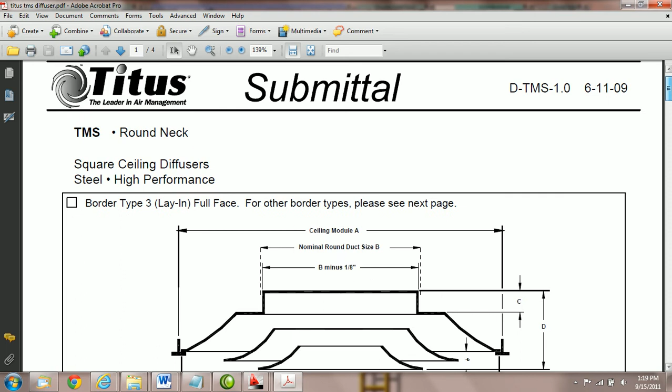What we have here is a Titus submittal sheet. We're going to build a TMS round neck catalog of grills, focusing particularly on the lay-in. We've got nominal sizes from 4 to 8 with a 24 by 24 face, and we're going to replicate this inside PractiCAD so we can use it for placement.

We're going to go into PractiCAD and must first access the grill section in the architectural. Let's go into Library in our PractiCAD ribbon or Express toolbar, and on the left hand side we're going to focus on architecturals. We need to click the plus key to open up all the different types of architectural entities PractiCAD provides, and in this tutorial we're going to focus on grills, so we'll hit the plus key and open them up.

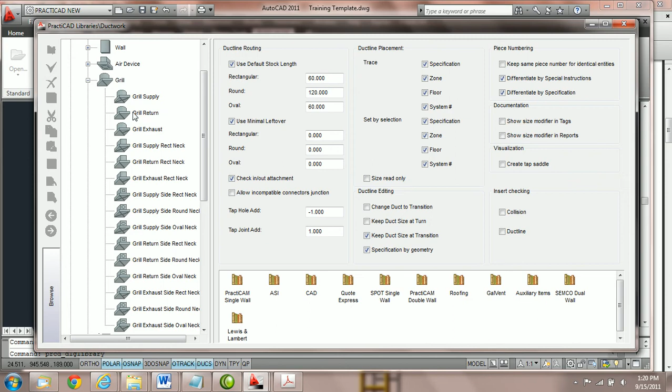Now there's a large variety of different grill types with different symbols. The one we're going to use here is the grill supply, and we're going to create a new catalog. First let's open up our screen by clicking on the restore or maximize button, then we're going to hit create a new catalog.

We're going to name it what we want to call it - we're going to call this TMS lay-ins. I happen to like to use capital letters for all of my catalogs, and I try to keep that consistent throughout the software. I recommend you doing the same for reporting purposes later, so for the catalog name, TMS lay-ins, I'm going to keep it 100% capitalized.

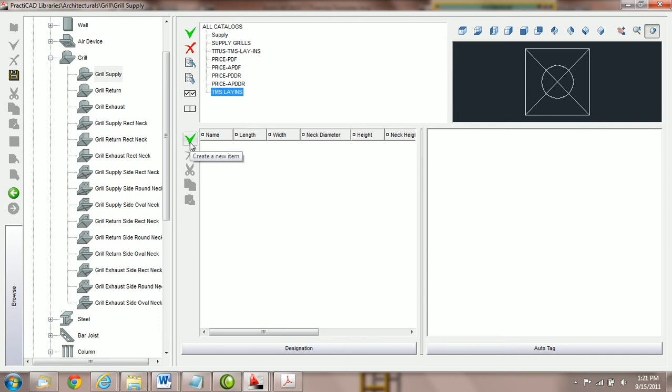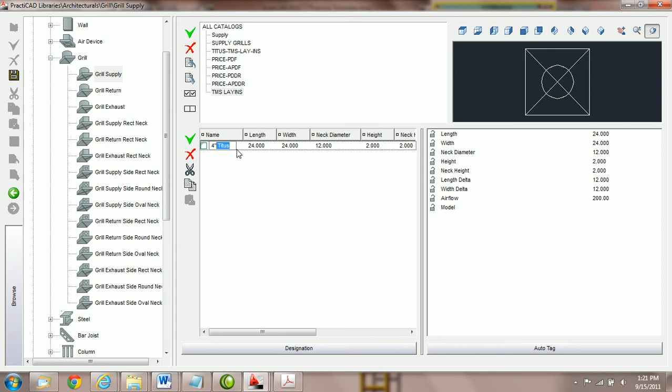Then what we're going to do is hit create a new item, and name it what we want. We're going to start with a 4-inch Titus. Here I usually use a capital letter and then lowercase, but you can use whatever you prefer - just keep it consistent anytime you're naming catalogs and the items inside, just as a recommendation. I'm going to hit Control C and copy this portion too because we're going to use it again.

Now what we need to do is focus on the parameters of the grill. We're going to put it into isometric view here, and first you can see we've got the face of the grill. The face parameters on our submittal sheet happen to be 24 by 24 for all the sizes we're going to use.

We're going to start with a nominal duct size, which is our B parameter - as you can see, it's our diameter. We're going to do one for the 4-inch and one for the 5-inch. You can see we've got a C parameter here, which is called neck height for us, and then you've also got D, which is the total height of the entire grill itself.

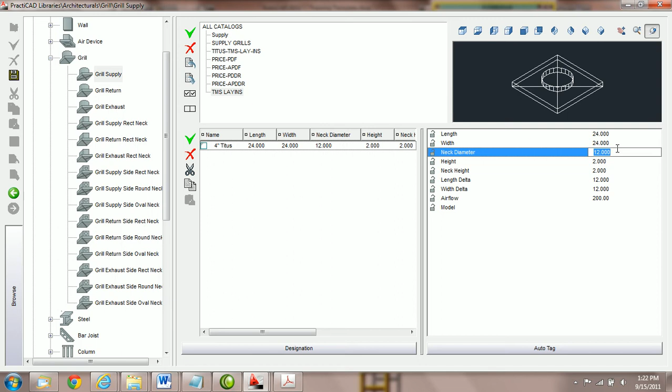So let's first go in and change the parameters to 24 by 24 for the face - you can see they're already set. We're going to say neck diameter is going to be 4-inch.

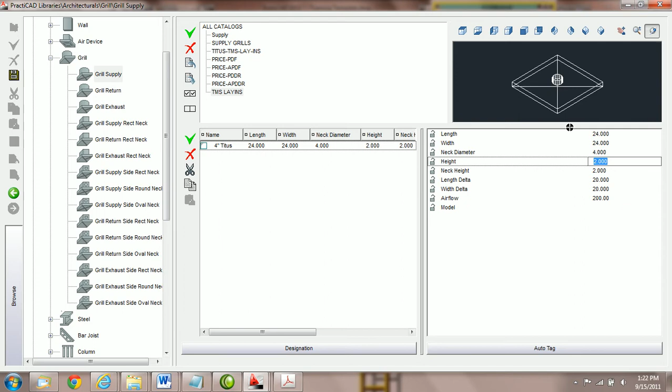You've got height - now height is actually, for us, the height below the neck. You can see here that they've got parameter D for the entire grill itself, but in PractiCAD, if we just look in front view, you can see that if the height is 0, the neck is still there. So if we make the height 3, that means there's 3 inches of body. And D in this particular PDF is actually for the whole thing, so what we're going to do is just take the D parameter they have, which is total height, and subtract the neck height.

That's going to give us the height of the lay-in we want to make here. Let's look at what it is. We can see that the total height of D is 5 inches, that's the entire height. We're going to subtract 2 3/4 inch, so we know the height is actually going to be 2 1/4 inches. And you can see that the C parameter, or the neck height, is going to be 2 3/4 inches.

So we're going to go back over to our PractiCAD. We're going to say that the height is going to be 2.25, and then we're going to say the neck height is going to be 2.75. And that would mean that this is now correct to what we see inside the PDF.

Length delta and width delta parameters we explain in other tutorials. They're really not used in this particular case, but what length delta is, is the difference between the length of the face and the diameter of the fitting. So if you take 24 minus 4, the length delta is the difference, which is 20. And width delta is the same thing, but it's the difference between the width of the face and the diameter. The tutorials on sidewall grills explain these parameters and why you would use them.

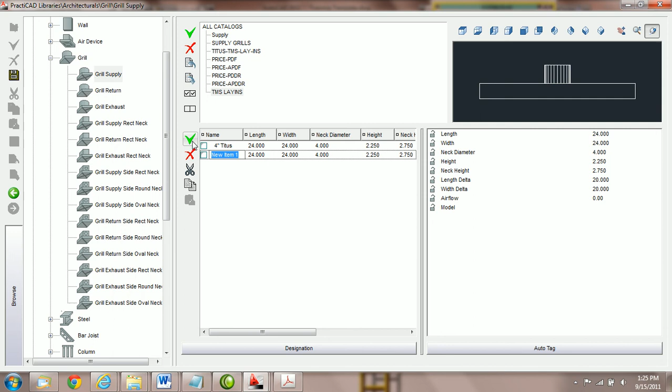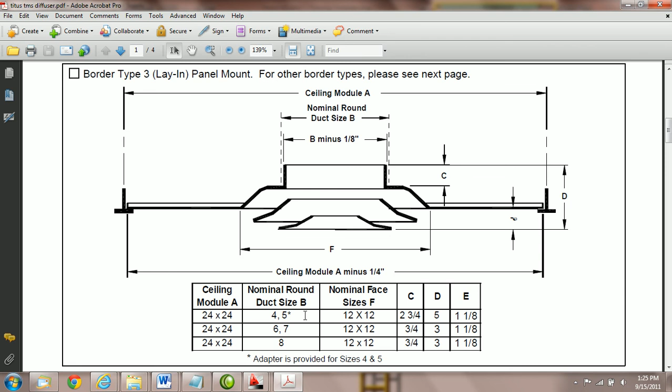We're going to hit the green entity, and that's going to make a copy of exactly what we just did. Now I'm just going to type in 5-inch and use my paste command because I had already copied the Titus, and I'm going to hit enter. When you hit enter, it brings it over to the parameters. Here all you need to do really is change the neck diameter, and that's it. Everything else for this particular size break is the same. So it makes it real easy to just copy, paste, and make the change that's different between them.

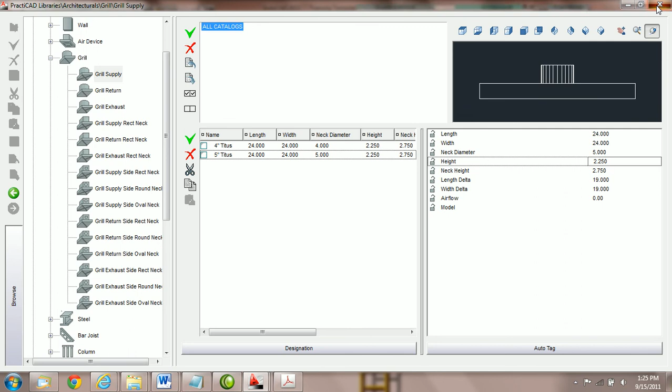And once we've done our entire list, we can now hit the save key. And if we'd like to bring the entire catalog of lay-ins into our bin, all I need to do is drag it from right here. I'm going to highlight it and drag it and place it into our bin. And what that's going to allow us, when we exit out of library, is now we can just simply come over, we can grab a Titus lay-in, and the catalog will open up.

We've only got 2 choices in the catalog currently. We're going to select our 4-inch Titus. We're going to hit place. Okay, you can see that the parameters are still here. We left them unlocked so that we can change them on the fly.

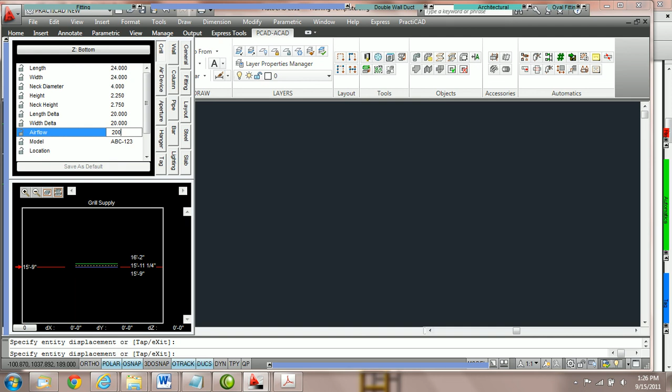Here we can give it a model number, ABC 123, and we can give it an airflow. All of this information can show up on your tags and reports automatically if you choose to do so. Currently, I have it set to tag model number, diameter, and CFM. So that'll conclude the tutorials on working with catalogs and grills.